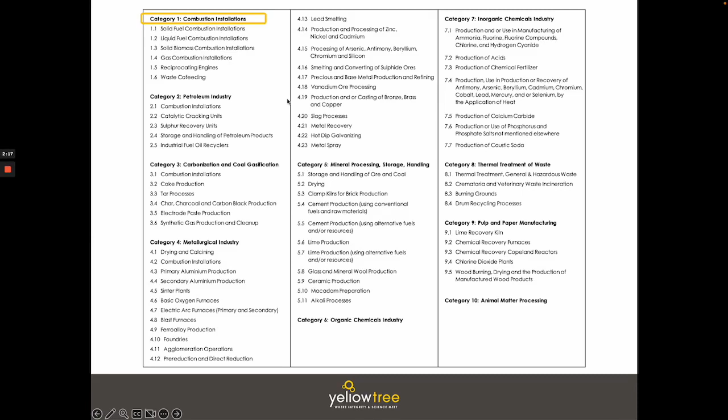It's important to note that as of today's date, which is June 2023, there is legislation in the pipeline that's going to add significantly to these listed activities. But the purpose of today's presentation is not to delve into these, other than to note that boilers are regulated under the listed activities in the combustion installations section. However, it's only boilers larger than 50 megawatts, so we won't deal any further with that in today's presentation, which deals exclusively with smaller boilers in the South African context.

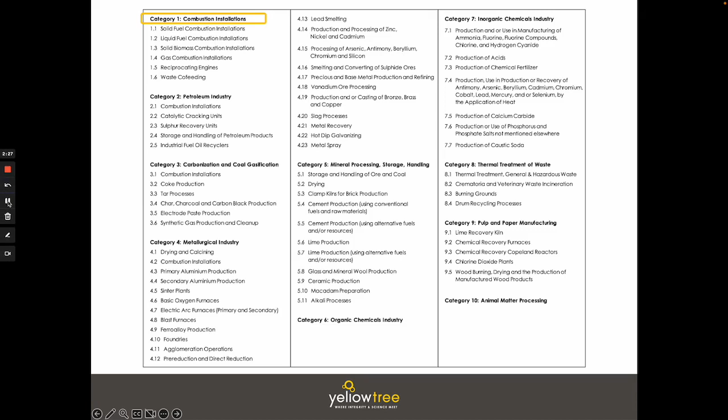So jumping back to the legislation, we see that we have controlled emitters, and the very first of these to be declared was in 2013 when the declaration of a small boiler as a controlled emitter was promulgated. I'm going to take you through these regulations, and this will be the main important part of the presentation. So please stop, screen grab this, get in contact with us, and ask for a copy of this presentation, and particularly this slide.

So the very first thing to note is that the legislation regulated boilers between 10 megawatts and 50 megawatts of net heat input. Now that's not the same as the megawatt rating on your boiler nameplate, which typically stipulates the output of the boiler. This pertains to the amount of fuel going into the boiler, the net heat input by design. So 10 to 50 megawatts of net heat input translates into a boiler size of about 14 tons per hour.

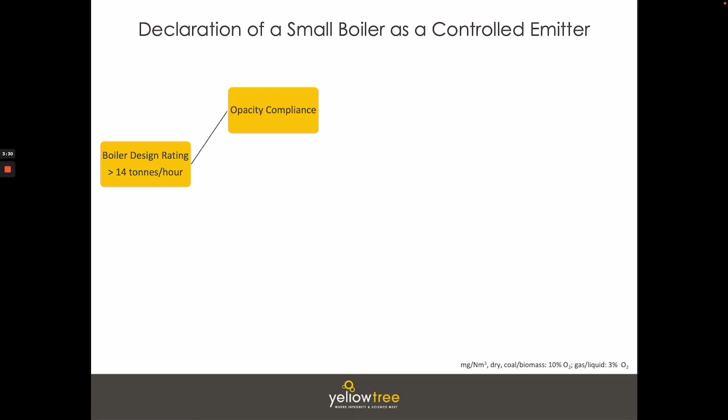And if you have one of these boilers, you are forced not to smoke too much. That's called opacity compliance. You are forced to conduct annual emissions testing, and you are forced to comply with the emissions limits. Now, when the legislation was promulgated, they devised two sets of limits. The first was for boilers manufactured after the legislation was passed, and naturally those limits are stricter. And the second set of limits was for boilers that were manufactured before the regulations were passed in November 2013.

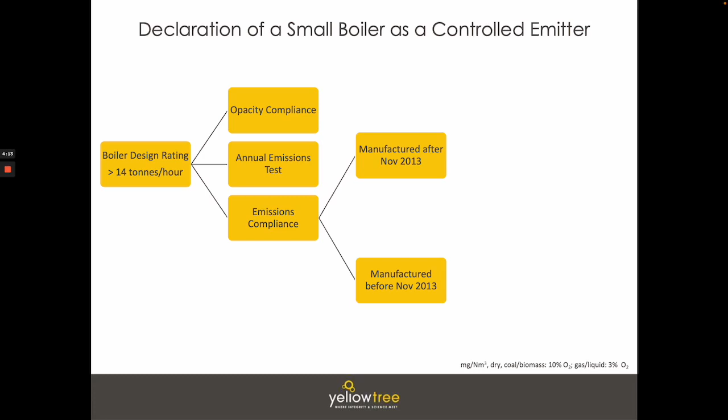Why November 2013? Well, that was the date on which the regulations were passed. And so essentially the policymakers said, you know what, we want to be lenient towards industry that already has these boilers installed, but stricter for those industries who are going to be installing boilers in the future, which is a progressive approach to policy making.

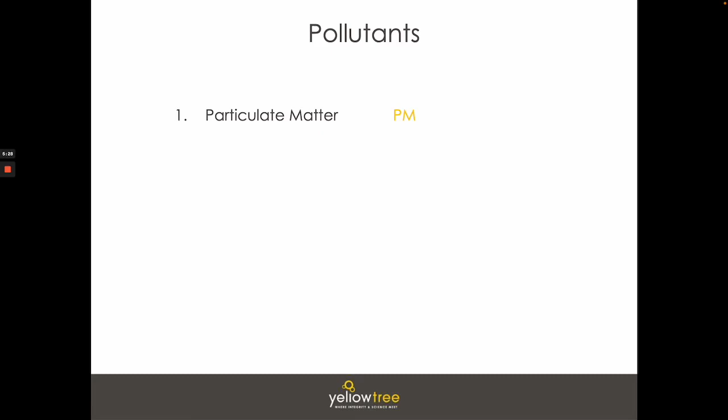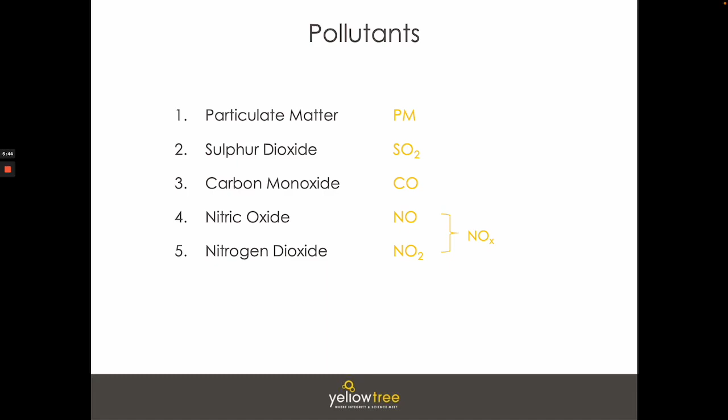So without further ado, let's get into those pollutants. When we at Yellow Tree do stack emission sampling, we measure particulate matter, sulfur dioxide, carbon monoxide, nitric oxide, and nitrogen dioxide, which together are called NOx. So the question is, which fuel has the highest emissions? That's always interesting—I love putting this to audiences and gauging the responses.

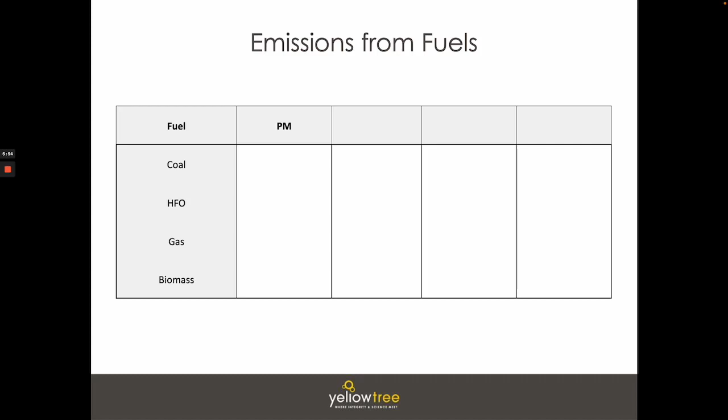Let's start with particulate matter emissions, in other words the smoke coming from the fuel. If you operate a coal-fired boiler, it's with good reason called dirty, because you'd expect emissions as high as 3,000 milligrams per normal cubic meter. Because biomass is a solid fuel, you'd similarly expect high particulate matter emissions. It's for this reason that coal and biomass boilers are typically equipped with abatement plant, such as multi-cyclones or bag filters, to arrest the high particulate matter emissions.

I will get into abatement plant in subsequent slides. Important to note is that HFO does actually produce a significant amount of particulate matter emissions, and what's even more concerning is that HFO-fired boilers are typically not equipped with multi-cyclones or bag filters, so this goes straight into the environment. Gas, obviously, is a remarkably clean fuel.

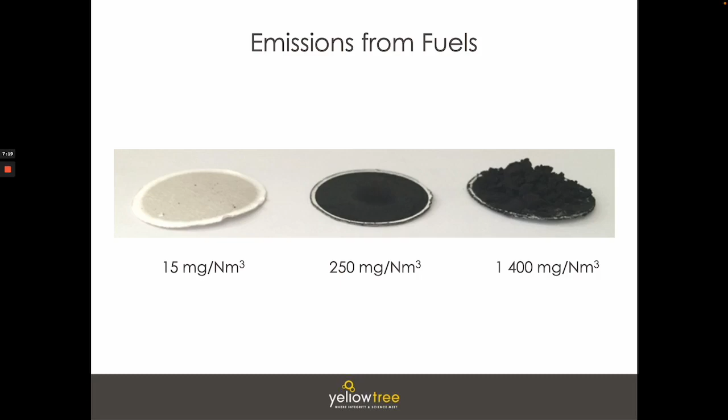Jumping back to our expected emissions—how do you think each of these fuels compares from the perspective of SO2, or sulfur dioxide, emissions? The answer is that coal produces moderate amounts of SO2 emissions, and I'll explain why on the subsequent slide. HFO produces an enormous amount of SO2 emissions, while gas and biomass are very clean, because they typically don't contain any sulfur.

Let's take a look at the sulfur content of various fuels. South African coal typically has 0.5 to 0.7%, or some would say 0.5 to 1%, of sulfur in it—a moderate amount. But HFO has 3.5% sulfur in it.

It's important to note—let's pause here for a second. Diesel has 0.05% sulfur in it if it's 500 ppm diesel. If it's 50 ppm diesel, then it has only 0.005% sulfur, which is very small.

As an interesting exercise, let's convert the 3.5% sulfur content of HFO to a ppm value. Why? Well, all of us are comfortable with ppm values—we pull up at the service station driving our bakkie and ask for 500, 50, or 10 ppm diesel, depending on how environmentally conscious we are. HFO at 3.5% sulfur has 35,000 ppm of sulfur in it. In my opinion, it's an environmental travesty that we're even allowed to burn HFO in South Africa. But there you have it, all the sulfur contents of a variety of fuels.

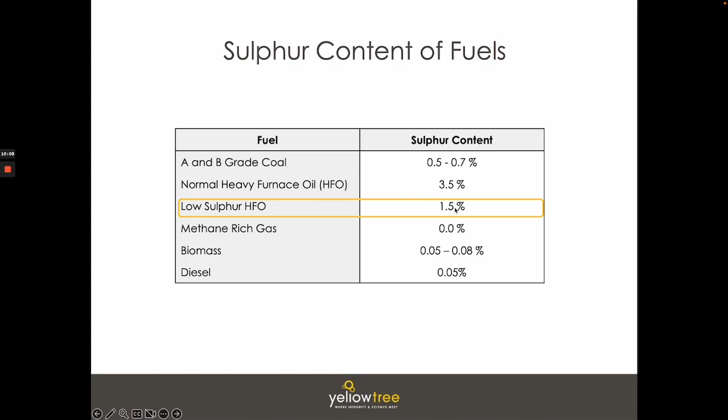So you would have to switch your HFO-fired boiler to burning diesel, for example, or potentially consider installing a coal-fired boiler or another boiler. Alternatively, one could treat the flue gas from the HFO-fired boiler by installing flue gas desulfurization, which I'm not going to go into in this presentation. But what I will say is that flue gas desulfurization is most easily addressed by wet scrubbing, because wet scrubbers spray water and SO2 is highly soluble in water, forming H2SO3. Or you can dose lime or a particular absorbent that will absorb the SO2.

Let's now take a look at the NOx emissions from this variety of fuels we're looking at. Coal produces moderate NOx emissions, HFO produces very high NOx emissions, and gas and biomass both produce very low NOx emissions. So once again, HFO is the highest offender here.

One might ask, how are NOx emissions formed? The answer is they are formed under conditions of very high temperature and where there's an abundance of nitrogen and oxygen available. So the reason we have lower NOx emissions when burning gas is because when one combusts gas, there's very little excess air placed in the boiler.

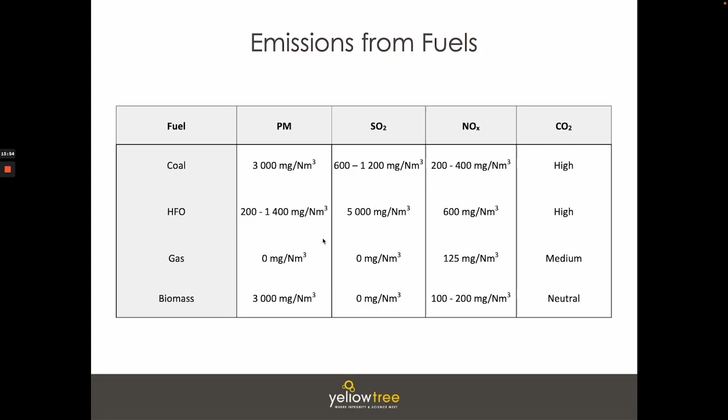And that does lead me on to the next section of the presentation, which is how do we reduce emissions? In South Africa, typically it's particulate matter emissions that we want to reduce, and wet scrubbers are one solution that will take care of particulate matter, but will also address SO2 because SO2 is soluble in water. All the other abatement techniques - electrostatic precipitators, multi-cyclones, and bag filters - will only address particulate matter. And it's very seldom that NOx emissions are addressed in South Africa. So without further ado, let's take a look at the abatement options available to us.

The most prolific in South Africa are multi-cyclones. These will pull your particulate matter emissions down to 250 milligrams per normal cubic meter, but will only really arrest particles larger than 5 microns.

And unfortunately, they'll break down the larger particles into smaller particles because of the strong frictional forces inside multi-cyclones. And that's not good because smaller particles stay airborne for longer and are the particles that have the biggest impact on human health. These are known as PM2.5 and PM10.

PM2.5 is so fine that when breathed in, it goes straight into your lungs, through your lungs, into your bloodstream, and has a significant effect on human health.

In fact, it's estimated that 79,500 deaths will be associated with the continued use of Eskom's current fossil fuel-fired fleet during its lifespan. So I think that's just an indication of how severe these particulate matter emissions can be, particularly the fine PM2.5 and PM10 emissions.

So let's take a look at how a multi-cyclone works. Here we see the particulate matter entrained in air entering the multi-cyclone. Multi means several cyclones. The air is swirling, as shown by the yellow arrow, but when the air gets to the bottom, it reverses direction and forms a small vortex or spiral and exits out the vortex finder at the top. The reason for that is because the air has nowhere to go, since the bottom of the multi-cyclone is sealed. Let's watch the video one more time.

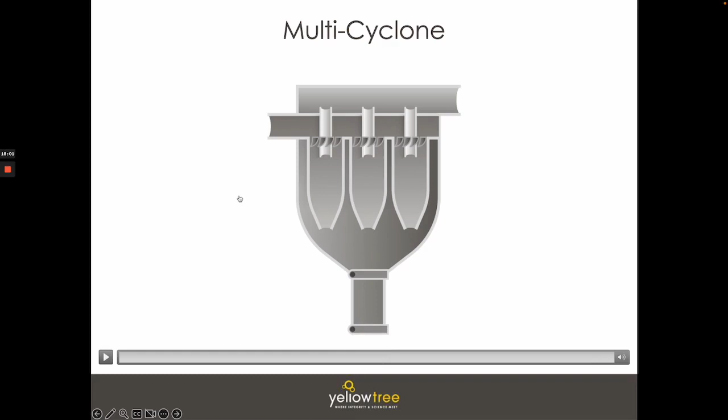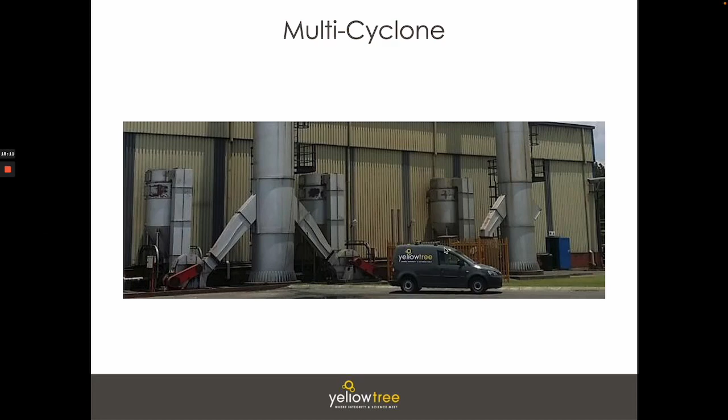Here's a lovely photograph of a multi-cyclone connected to a stack, and another multi-cyclone connected to a common stack. At the bottom over here, you will see the ID, or induced draft, fans.

Another great picture, shown a little bit closer up. Here we have the dirty flue gas exiting from the boiler, as shown by my mouse. It would then spiral through multi-cyclones, or cyclones housed in this multi-cyclone casing. The particulate matter would be discharged through this trickle valve or dual flap system, which in this case is automated by a little motor, and collected in the trolley at the bottom, while the cleaned gases would exit through the ID fan and out the chimney stack.

However, it must be noted that while these gases have been cleaned from 3,000 milligrams per normal cubic meter to 250 milligrams per normal cubic meter, 250 is still a large concentration of particulate matter, especially when one considers that the majority of that will be PM2.5 and PM10.

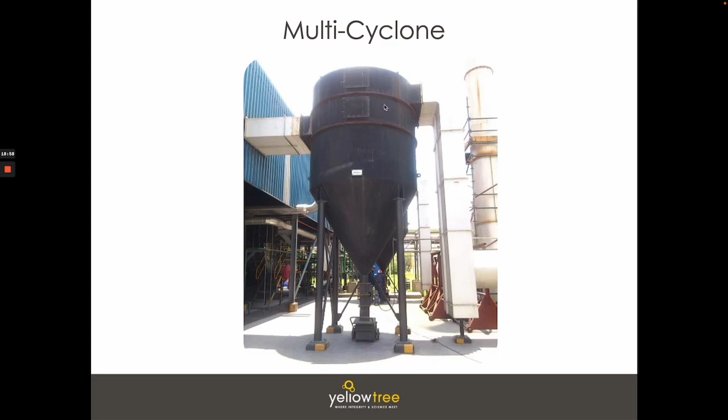Now, there are a number of problems associated with multi-cyclones. The first is that the cyclones are housed inside a closed body, and so they're often not inspected. We've done a number of multi-cyclone inspections using a specialized camera rig, and this video will reveal that a lot of the cyclones inside the multi-cyclones are actually completely eroded.

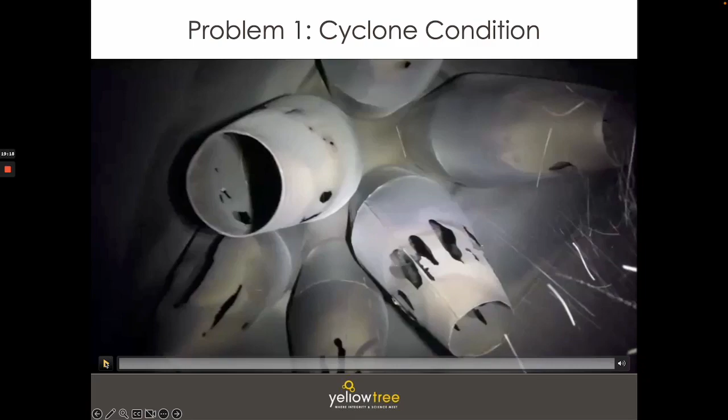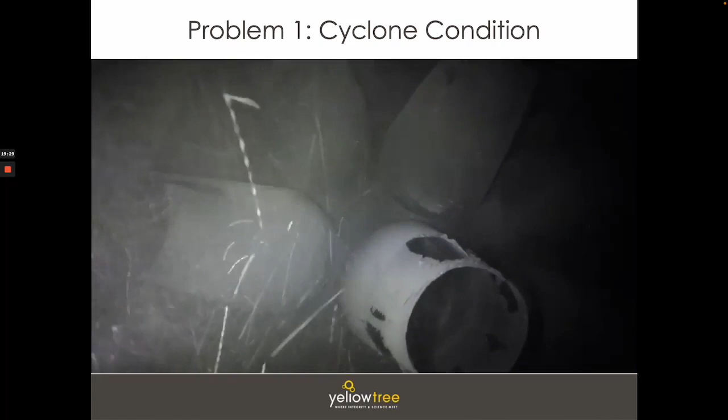Those ones are in good condition, but those are in poor condition. And those ones are completely disintegrated. And those ones are in good condition.

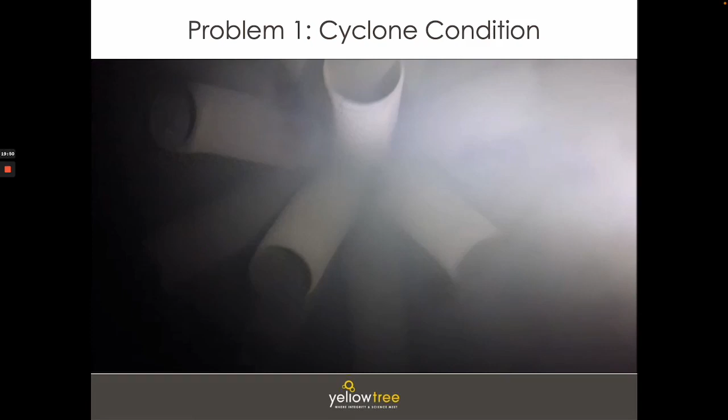So as you can see, multi-cyclones require a lot of maintenance and are often not seen until we come and do stack emission sampling and measure very high particulate matter emissions, and then questions are asked around the condition of the multi-cyclones. Another common problem is that those two flaps at the bottom that are supposed to maintain a seal often become stuck open or erode entirely because the particulate matter is very abrasive.

One of the solutions is to use a Benox plate at the bottom instead of a regular mild steel plate, but even then, regular maintenance and inspections need to be done.

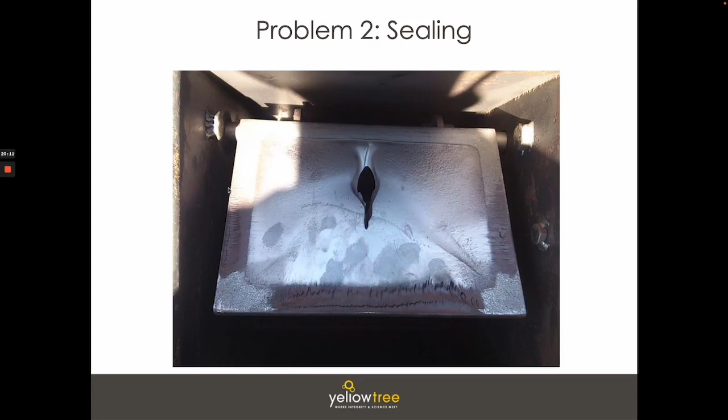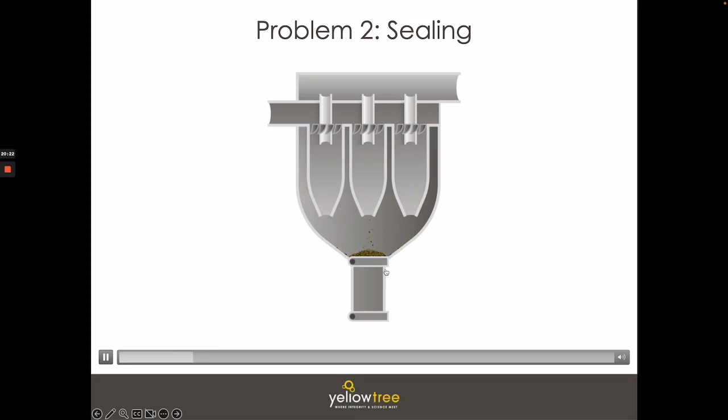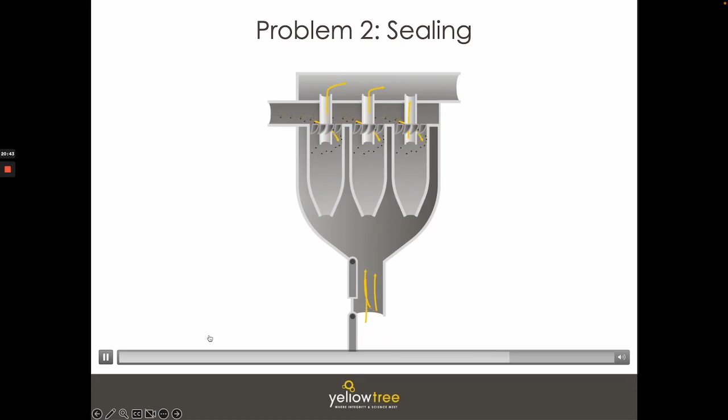So what happens if the seal is broken? Well, this video answers that question. Here we have the multi-cyclone operating normally. This flap opens but becomes stuck open, and then the bottom flap opens and also becomes stuck open, and then we have air being drawn in from outside because the ID fan is downstream of the multi-cyclone. That just destroys the vortex inside the cyclone, meaning that all the particulate matter essentially exits out the stack, and the multi-cyclone is really just bypassed.

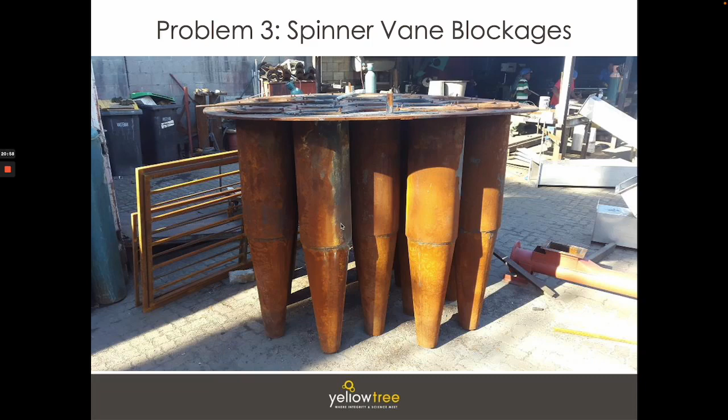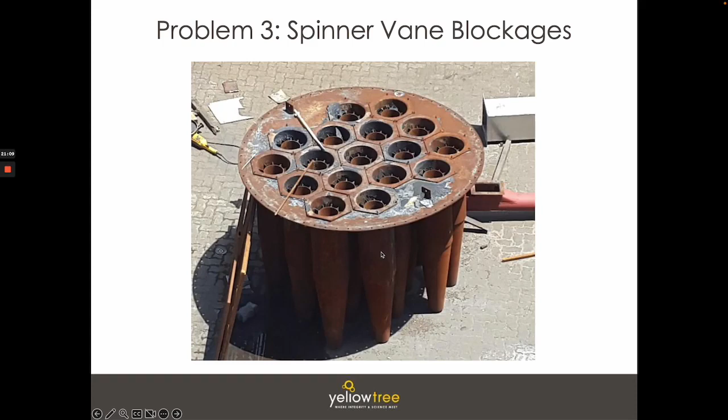The next problem is blockage of the spinner vanes. Here we can see the individual cyclones that have been pulled out of a multi-cyclone. The cyclones are in good condition, so all looks good. However, if we look from the top, we will see that the spinner vanes over here, which create that vortex swirling motion inside each cyclone, are completely blocked with particulate matter. This is often an unseen problem, and the result of this is shown in the following video.

Here we have particulate matter entering. The first cyclone is working well, but the latter two are beginning to block up. Because there's a blockage, these two cyclones form an easy exit path for the air, so it's no longer forced to spiral downwards and reverse its path. It has a short circuit out these remaining two cyclones, and this greatly limits the efficiency of a multi-cyclone.

Let's watch that video one more time. Here we have the air swirling. Normally it would reverse upwards and exit out this vortex finder, but instead it has an easy exit path.

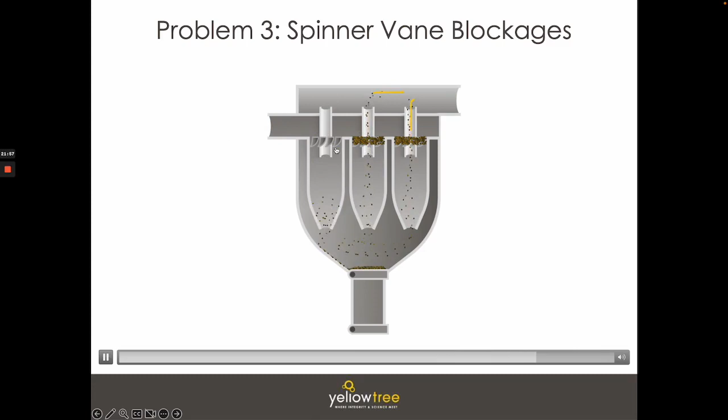Essentially, multi-cyclones create a new air pollution problem that didn't exist. You've got particulate matter coming off the back end of a boiler, and some of those particles are really large and would be of no harm to the environment and would naturally fall out of the air. But instead, those big particles are broken into finer particles inside the multi-cyclone, are not captured, and exit as far more dangerous PM2.5 and PM10.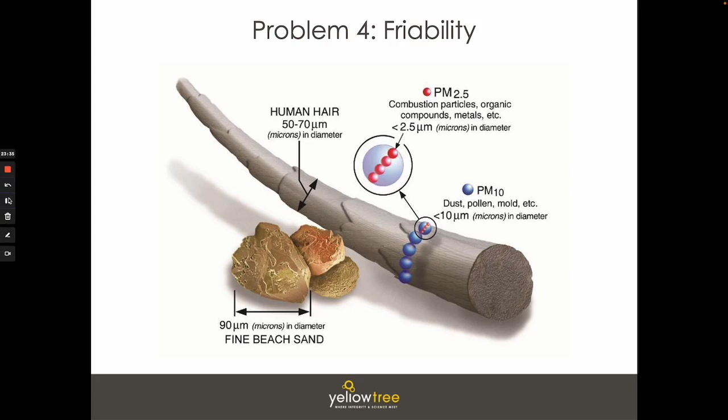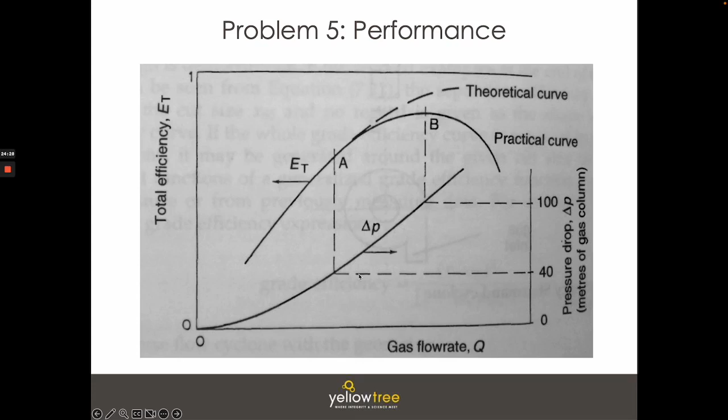And if you are running your boiler really hard and pumping too much excess air through it, which is a common problem in South Africa, boiler operators will pump excess air through the boiler to clean up the emissions. But that reduces the thermal efficiency of the boiler, and also reduces the effectiveness of the multi-cyclone. Then you'd be operating on this part of the curve, with diminishing effectiveness. So the variable efficiency of a multi-cyclone is one of its drawbacks.

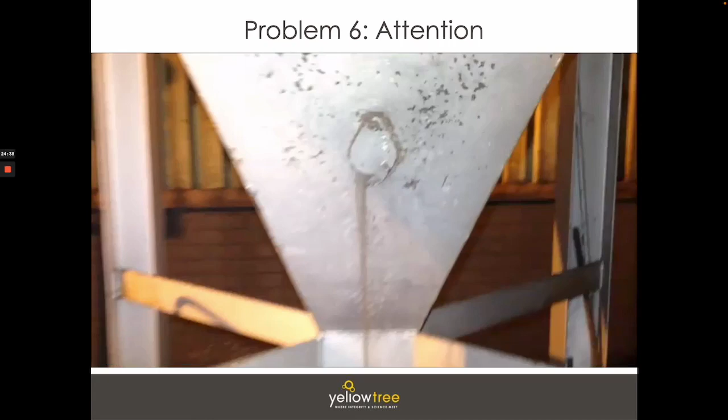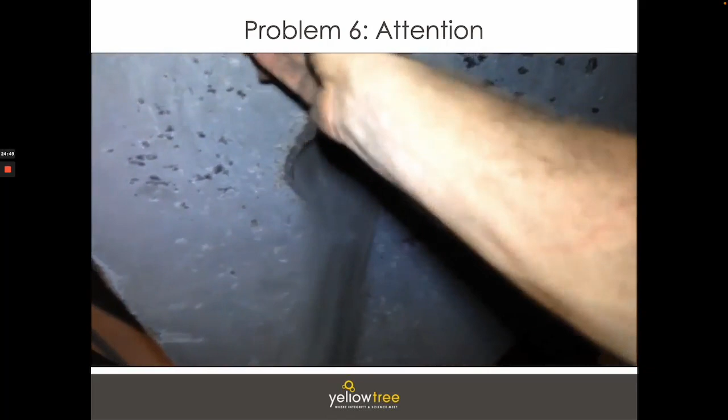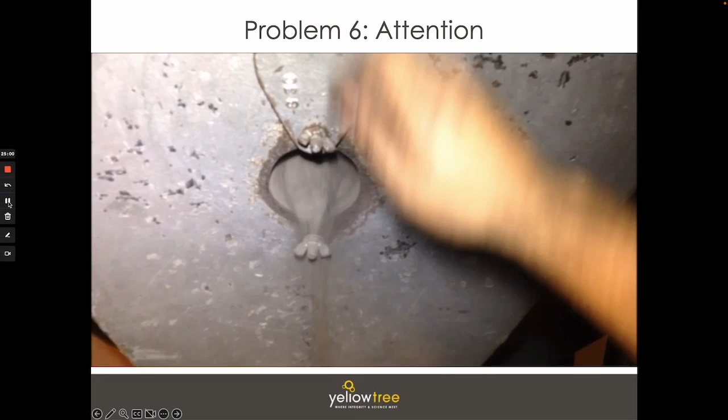One of the other drawbacks of a multi-cyclone is that because it's a completely sealed unit, it often does not receive the attention it should. This video tells a wonderful story in that regard. Here's a multi-cyclone that I opened up, and as you can see, the whole unit is filled with particulate matter. That means this multi-cyclone is essentially bypassed, filled all the way up to the top, and is not performing any separation functions. So that wraps up multi-cyclones.

Let's look at another technology, bag filters. Bag filters represent the Rolls-Royce solution. They will pull particulate matter emissions all the way down to 15 milligrams per normal cubic meter by way of concentration, and they will arrest all of the smallest particles. Most of the PM10 and PM2.5 will be caught. In fact, it's only particles smaller than 0.2 microns that won't be captured.

This makes bag filters the ideal solution when installing a new boiler manufactured after November 2013, which must meet the strict limit of 120 milligrams per normal cubic meter. Multi-cyclones will only make it possible to meet the limit of 250, and even then they'll struggle to do so consistently, whereas bag filters will pull emissions down to 15 milligrams per normal cubic meter consistently. Manufacturers of bag filters will guarantee emissions below 50 milligrams per normal cubic meter, which is excellent, and as I mentioned, we continuously measure about 15 or 20.

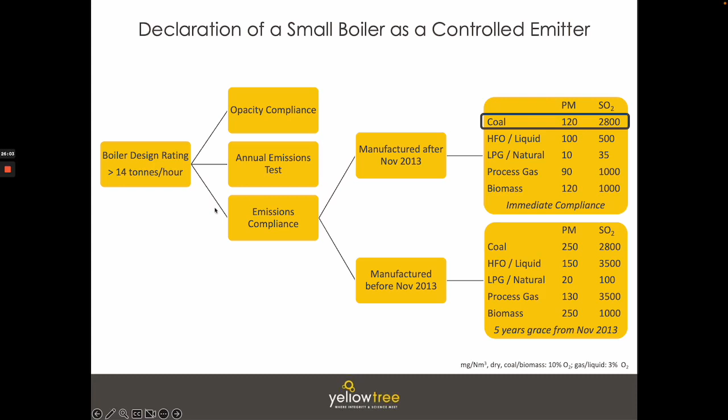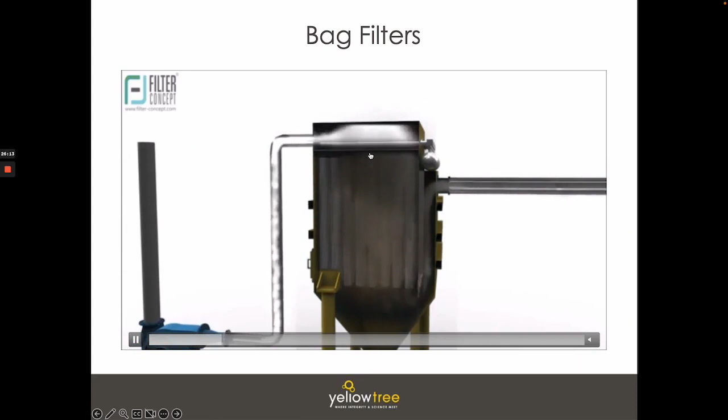So how does a bag filter work? This video will answer that question. Here we have the dirty gas entering the bag filter. It passes up through an array of bags and leaves the top of the bag filter as cleaned air.

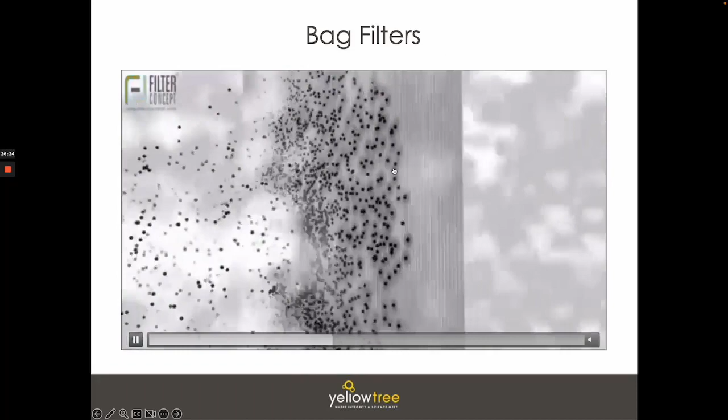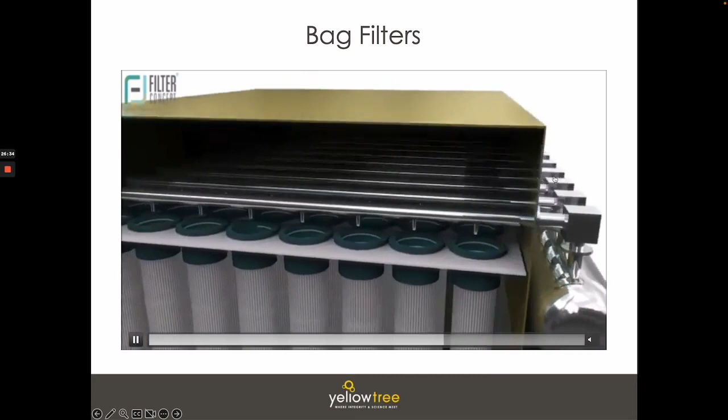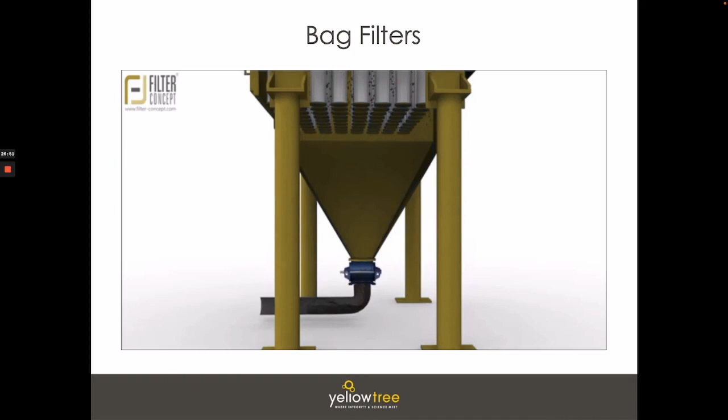The particles build up on the bags, and as they build up, air struggles to make its way through, leading to a greater pressure drop over the bag filter. As a result, we have a plenum of compressed air on the side of the bag filter that injects compressed air into the bags, cleaning them while the bag filter is online. It's amazing that this unit can clean itself while online. That's often called a jet pulse bag filter.

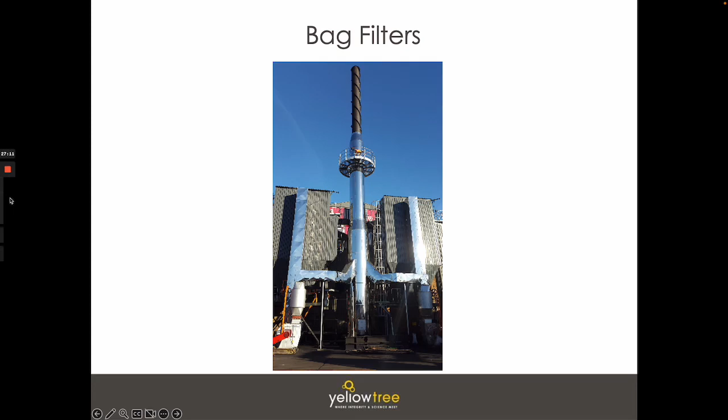There's a photograph of two bag filters installed side by side serving a common stack, installed downstream of two 10-ton per hour coal-fired boilers. What's important to note is just how large these bag filters are. Multi-cyclones are probably a third of the size. There is another lovely photo of a bag filter installed on an 8-ton per hour coal-fired boiler.

What's important to note is there's actually a little multi-cyclone upstream of this bag filter. That is sometimes common practice, to put a multi-cyclone directly downstream of the boiler to arrest the majority of the particulate matter, therefore preserving the bags, in inverted commas. However, many manufacturers of bag filters will tell you that the cake that builds up on the bags is actually really helpful in filtering, and so they'll recommend installing the bag filter directly downstream of the coal-fired boiler.

Once again, an important reminder that a bag filter is not suitable for a biomass-fired boiler, in other words, a boiler fired on wood, because often the particulate matter from wood is very light and fibrous, so it's carried out and remains entrained in the air, making contact with the bags while still burning. That leads to a fire in the bag filter and is not a good solution.

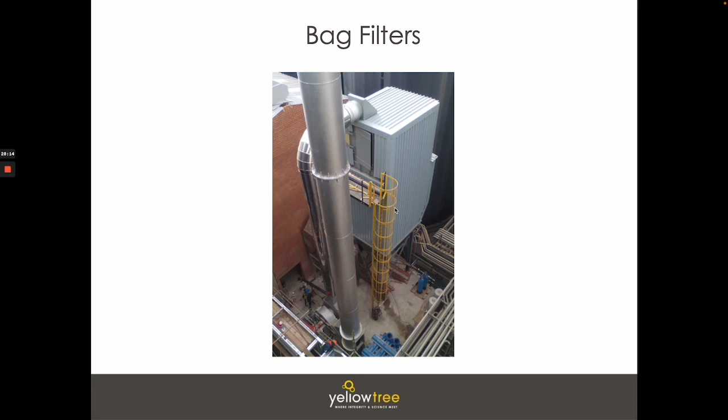So that wraps up bag filters. There is one more technology that is far less common in South Africa, but still very useful, and that is ESP, or electrostatic precipitator technology. It arrests most of the small particles, but it's not as effective as a bag filter.

The nice thing is the concentration that it will arrest down to can be user specified. This is because there is free airflow through the electrostatic precipitator. You can simply make the precipitator bigger and put more electrically charged plates in it to catch the particles, pulling the particulate matter concentration down to a lower value.

If you're on a tighter budget, you might not pull it down to as low a value, and you might design a smaller unit. However, with bag filters, you don't have that luxury. The unit is sized based on the airflow through it, and it's based on that airflow that you have to size it.

So you're stuck with a really good emissions concentration of 15 milligrams per normal cubic meter. You can't say, well, I would like to pull my emissions only down to 120 milligrams, which is the limit for new coal-fired boilers installed after November 2013, so I'm going to install a smaller bag filter. That wouldn't cut it, because you'd have a very high pressure drop over that bag filter due to the bags, and it wouldn't operate as required.

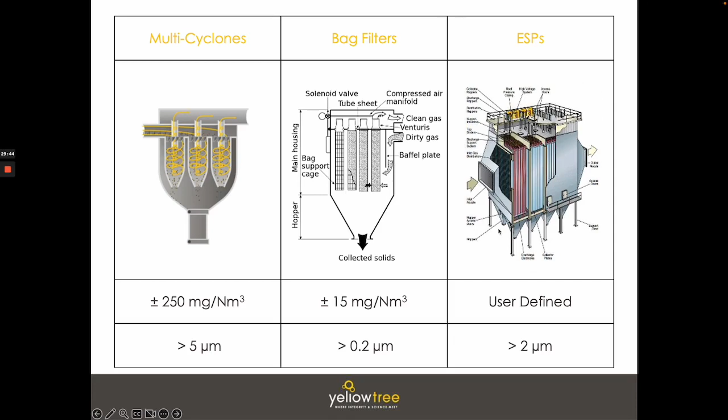So bag filters are sized based on pressure drop, whereas electrostatic precipitators can be sized based on the concentration of particulate matter that you desire.

Here's a lovely photograph of two electrostatic precipitators serving two biomass wood-fired boilers. ESPs are suitable for wood firing instead of bag filters because they're not prone to burning down when small embers, small particles still burning, make contact with the plates.

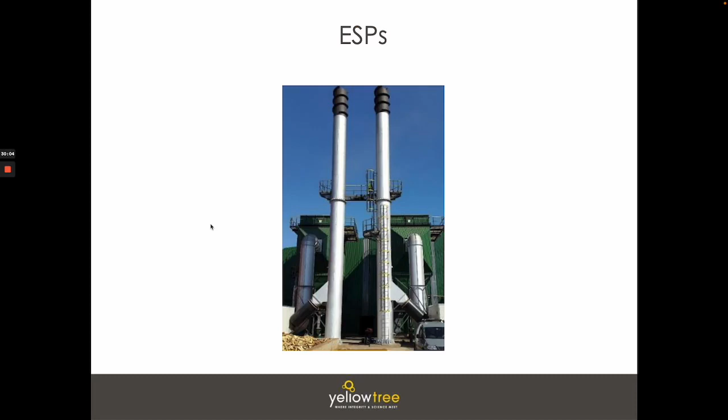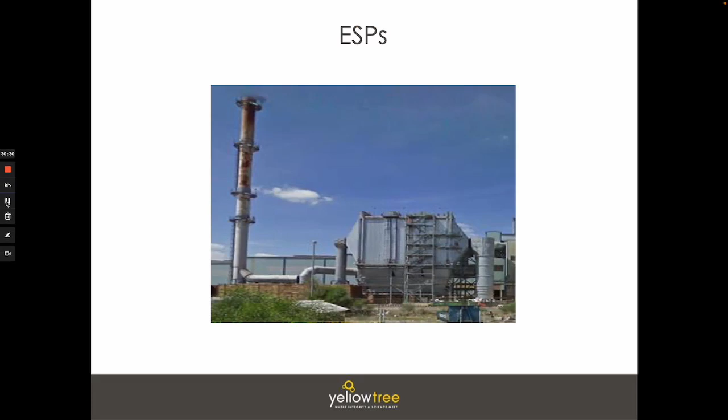So that brings me to an end of our presentation.